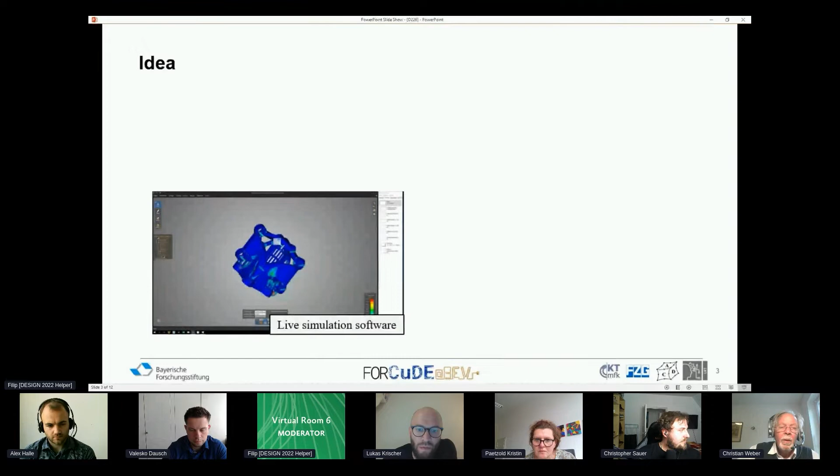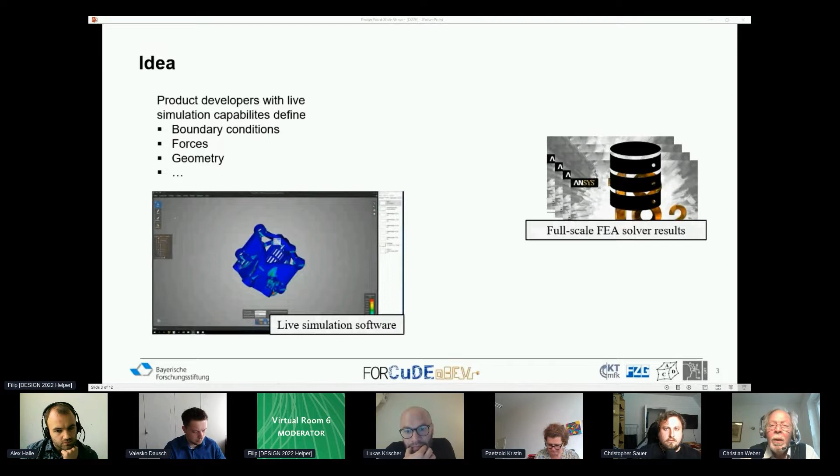So in our case, product developers have some kind of live simulation capabilities, which allow them to use live simulation software and to define some boundary conditions, some forces, some load cases, and mainly their geometry using their computer-aided design software. However, as a database, you need to have some full-scale finite element analysis solver results that you trust. This is your trusted source of data.

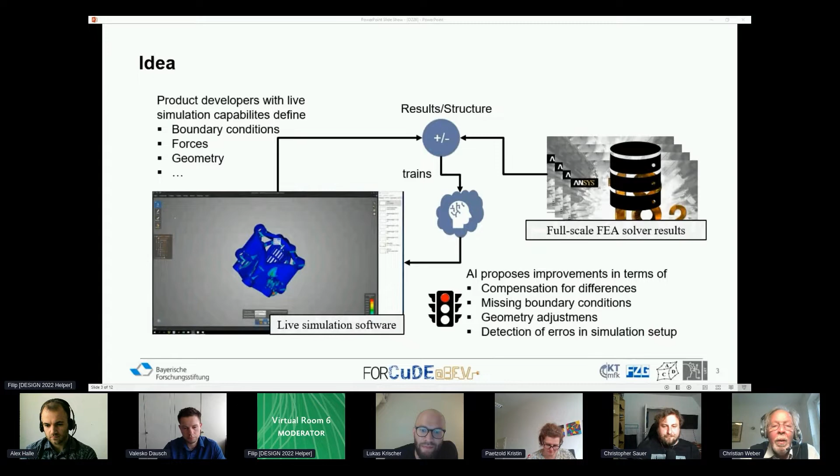So the idea was to compare both regarding their results, mainly in displacements, forces, and so on, and compare their structural build-up - boundary conditions, definition of load cases, and so on. With this comparison, we then wanted to train some kind of AI or engineering support system, which is able to propose improvements to the product developers and give them some kind of grasp on their design, putting away pressure from the simulation experts, which maybe need to do some kind of early evaluation of designs in this case.

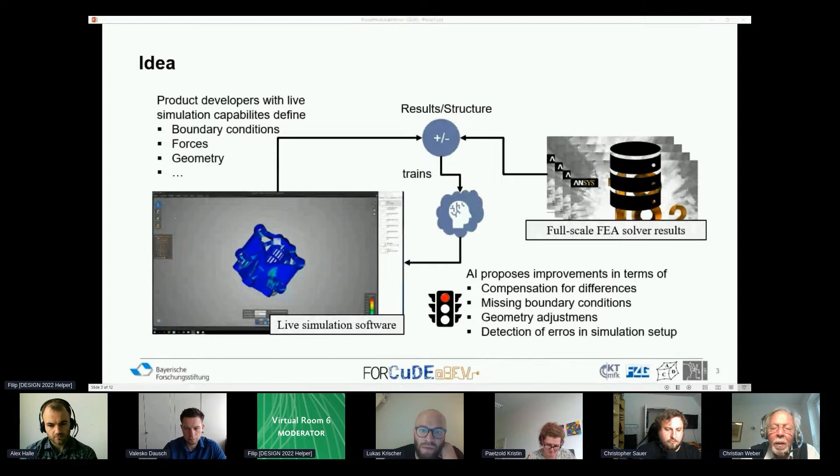So the AI proposes improvements in terms of compensation of differences, maybe analyzes missing boundary conditions, proposes geometry adjustments, and detects errors in the main simulation setup. This could happen via a traffic light, for example.

The concept in our paper was we would like to put the inputs - so for example, geometry, parametric design parameters, if you use parametric CAD models, the boundary conditions, forces, and the solution of the live simulation software - into some kind of machine learning model. Inside the machine learning model, there would be defined some kind of model, for example neural networks, decision trees, or support vector machines, and the architecture or the hyperparameters of the respective machine learning model.

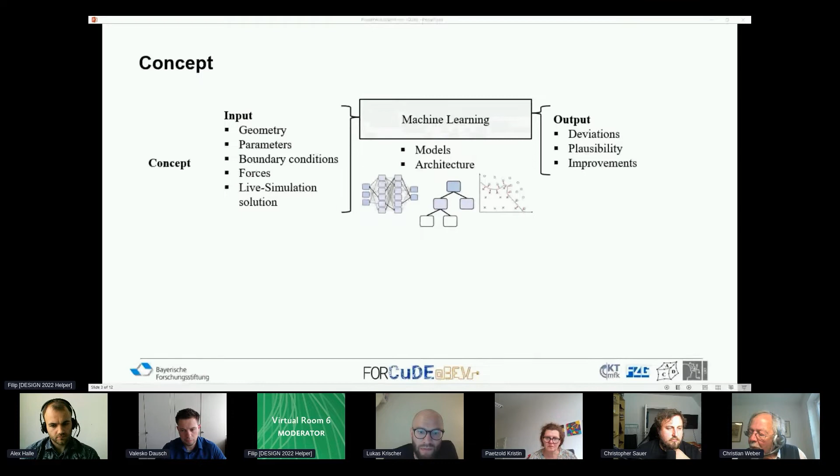And the output would be the deviations between the live simulation solution and our trusted source of data, the full-scale finite element solver results. Output could also be plausibility, meaning does this fit to my defined boundary conditions or defined forces in my trusted source of data? And output could also be some kind of improvements - for example, chamfer this radius or something like that.

We broke down this concept into a use case or a prototype. This prototype mainly consists of the geometric parameters with a parametric CAD model and the forces that would be applied to this model. The boundary conditions would be set fixed in this case. We would use a decision tree algorithm for our use case, and the output would be some kind of difference between the live simulation result and our trusted source of finite element results.

It is worth noting that the finite element results - the parametric sets differ between the live simulations and the finite element results. So we wouldn't have to fit the model. We would build up the machine learning model, which needs to interpolate between our data points from the finite element results.

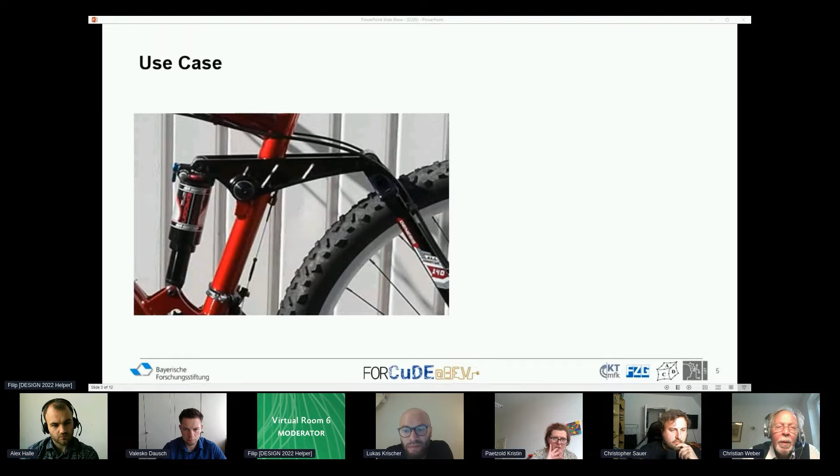As I said before, for our use case, we set out for a mountain bike rocker switch, which was modeled in PTC Creo with parametric modeling, and then later loaded into the ANSYS Discovery live simulation software, where we applied some boundary conditions.

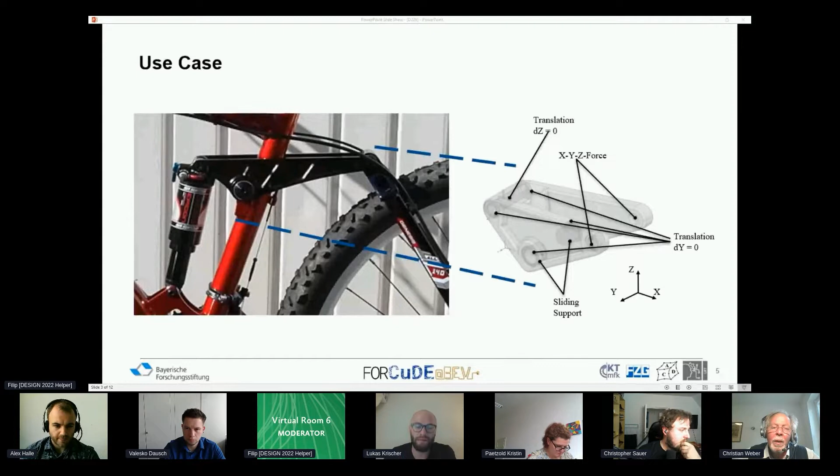You can see that here in this picture. For example, we fixed the translation in the z-axis where the spring is located, and we applied an XYZ force where the wheel would bring in the forces during driving. On the bottom-hand side, we had a sliding support where the rocker switch is able to move freely between the screwed-in parts.

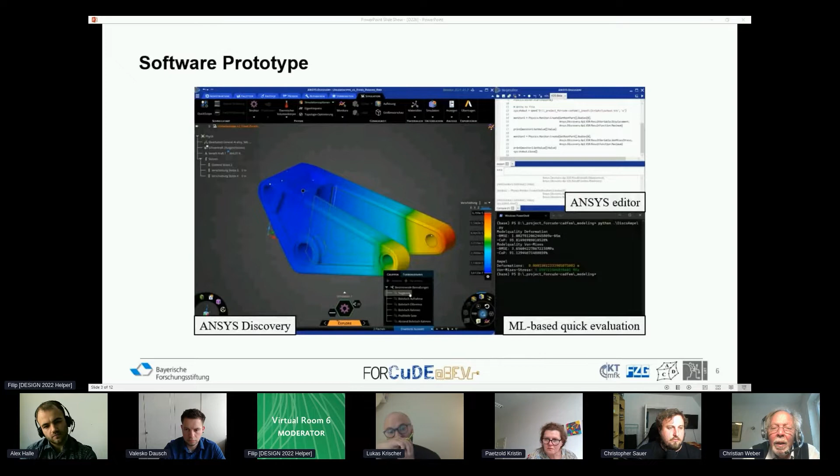So here you can see our software prototype. On the left-hand side, the product developers would see their current mountain bike rocker switch design in ANSYS Discovery. On the right-hand side, we have the script editor and the ML-based quick evaluation, which allows us to see directly an 'ampel', meaning traffic light in German, showing the deformations, the deviations between the live simulations, the deformations from the machine learning model of the finite element results, and the von Mises stresses.

Our results looked very promising compared to a machine learning-based only approach, where we would train our machine learning solution based solely on the finite element results. We can see here, for example, by voxel size and live simulation accuracy of nearly 33%, we win over the ML-based only prediction model concerning the relative root mean squared error of our models.

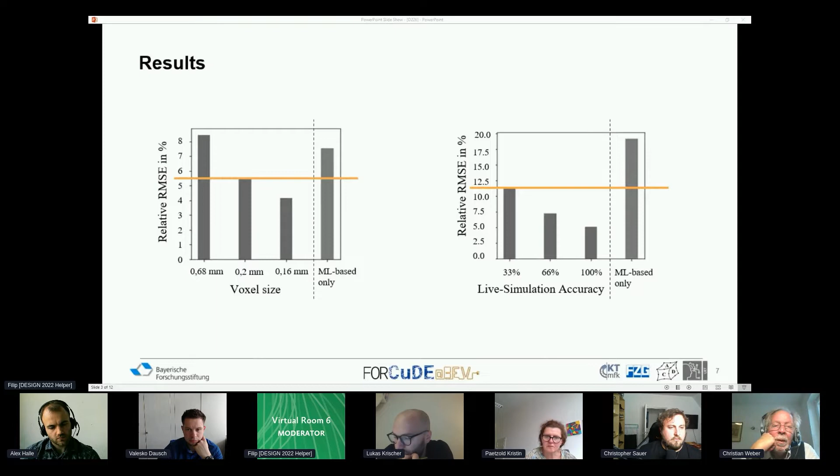This research was part of the Bavarian Research Association project FORCuDE. Thank you for your attention, and I'm happy to answer your questions.

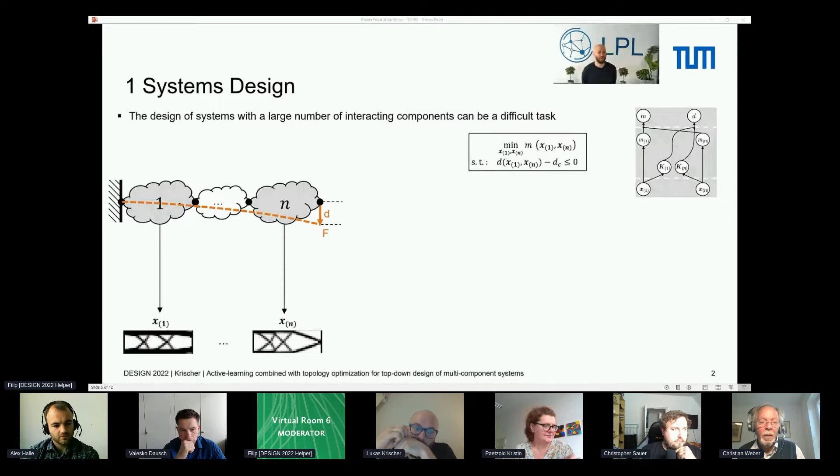You would usually just right away design the system using classical monolithic optimization approaches. However, with drivers of complexity such as the number of components, the different poses, or multiple disciplines, this task gets more and more complex.

Therefore, in systems design, you usually apply decomposition schemes. Decomposition schemes have the disadvantage of intense coordination effort, as they try to communicate information between systems and components to each other. A different way of handling that is solution space engineering.

Here you make a complete decoupling, meaning there is no further communication between the components and the system after decomposition. However, this complete decoupling also has disadvantages. The first one is the exclusion of optimal designs. The second one is a commitment to a design that you cannot build later on.

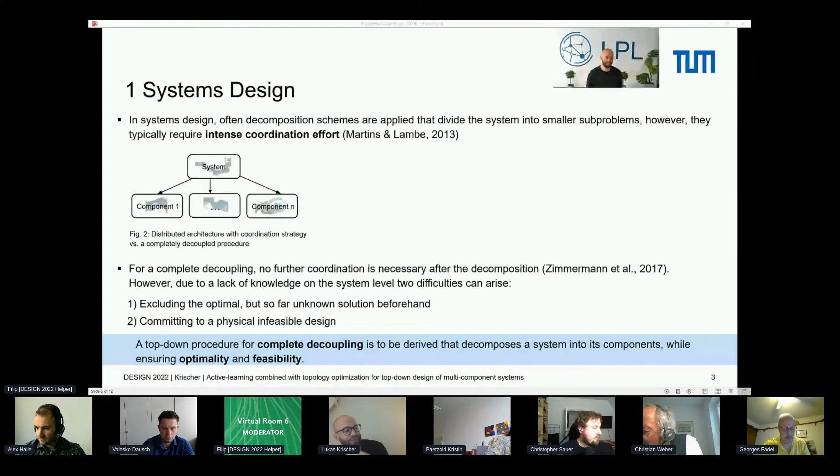Based on that, we derive that a top-down procedure is needed for complete decoupling that still enables optimality and feasibility. Based on this conclusion, an approach called informed decomposition was developed. It consists of a two-step optimization.

On the system optimization level, we carry out an optimization based on meta models that ensure both feasibility and optimality. It is carried out on a reduced order model, meaning this system optimization is quicker than a classical monolithic optimization. Afterwards, you can derive decomposed component requirements based on the stiffnesses of each component.

And then you only carry out the expensive topology optimization based on finite element models. This has one big advantage, because this optimization is based on stiffnesses and not on load cases, meaning you only need to carry it out once, independent of the number of poses, load cases, or components.

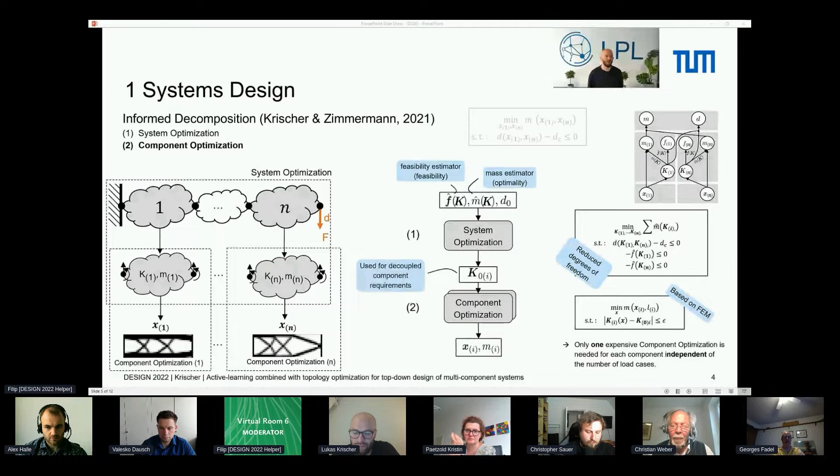One disadvantage of this method is the training of the meta models. Since the system optimization is based on machine learning models, you need to create the input data for it. This training process is computationally expensive, and on top of that, the training data is also not well distributed, meaning most of the design space you are sampling in is infeasible.

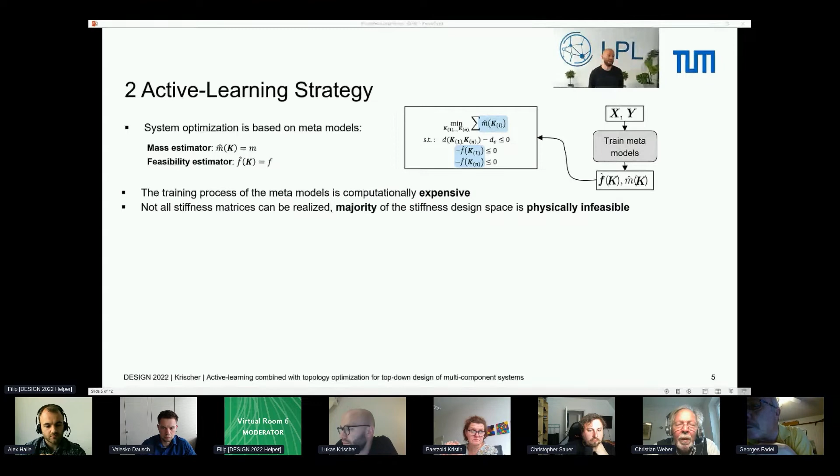Therefore, within this presentation, we will introduce an active learning strategy that should ensure both an efficient training process and well-balanced training data. Secondly, since we want to avoid additional training, we want to have meta models that can work with different geometrical dimensions.

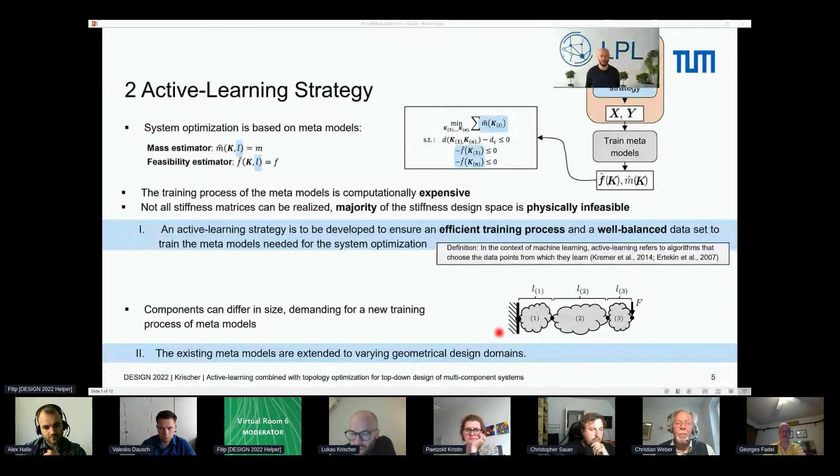So imagine, for instance, this three-component system with different lengths. We want to have meta models that can be used for all three components, for instance. The active learning strategy itself consists of two parts. The first part is concerned with classification sampling, so here we want to figure out where the boundary is.

So where are the physical feasible and infeasible designs? Based on this classification sampling, we afterwards only want to sample within the feasible region and want to know the relation between the stiffness of a component, the geometrical dimensions, and the mass of the component.

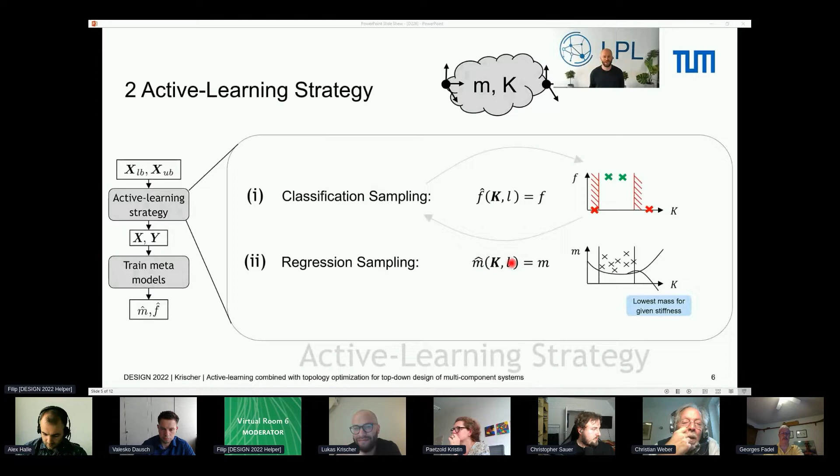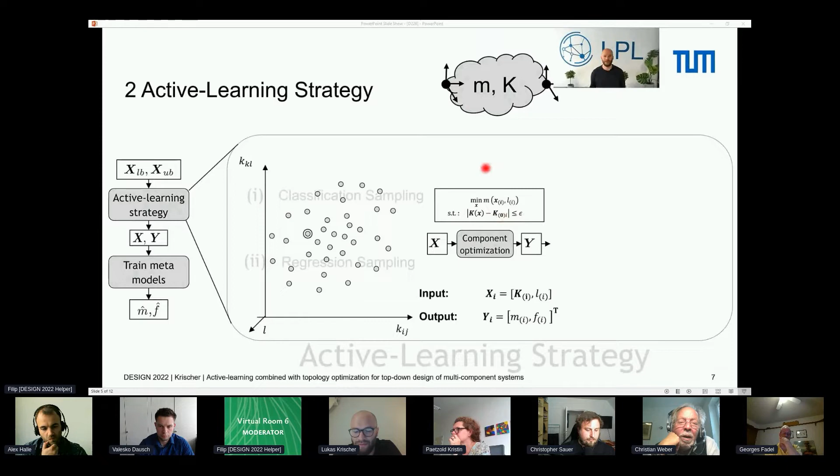To explain that more in detail, we now go through one iteration exemplary. Imagine you have a sample of stiffness values, and you just choose one of those values and evaluate it by the known component optimization. Now we are looking for the minimum mass with respect to the given stiffness values. And if the optimization converges, we know two things: we know that this stiffness combination exists, and we also know the mass of the component.

We can do that for a different value, and we again figure out, okay, this design exists. However, if we choose a data value which is out of the feasible region, the optimizer won't converge, and we then know that this design does not exist.

With this method, we can then compute a decision boundary, and based on it, we can carry out another iteration. So we choose just points that are close to the decision boundary, and re-evaluate all those points. After a certain number of iterations, we choose the final decision boundary and only sample within this boundary to get information about the relation between the stiffnesses and the mass values.

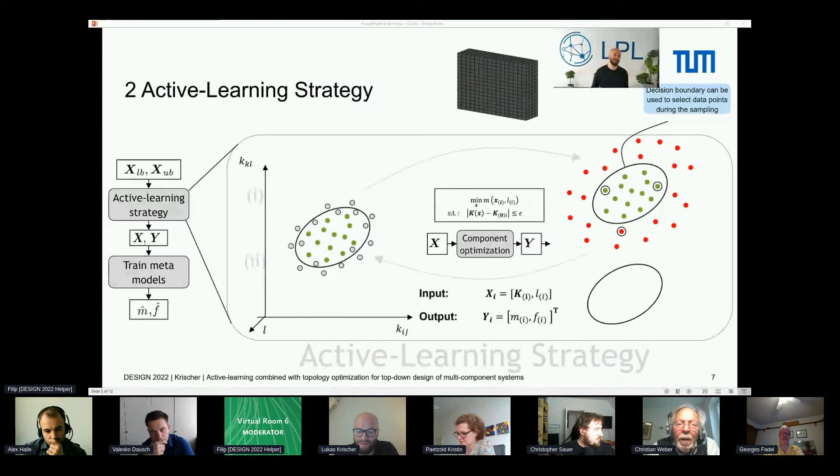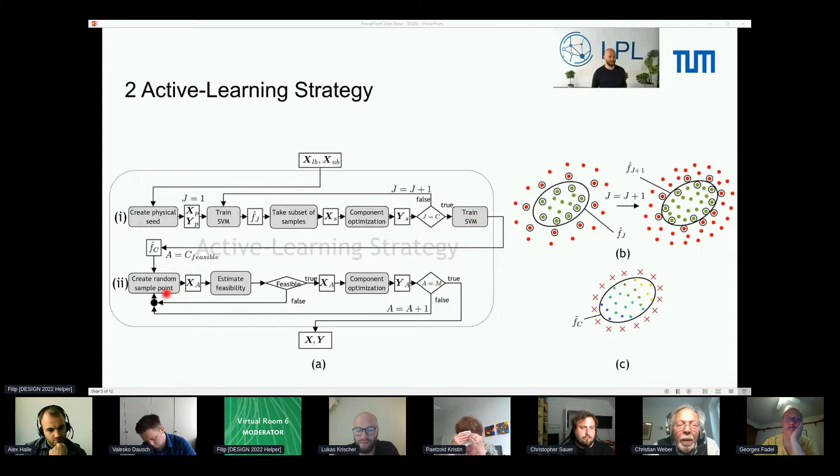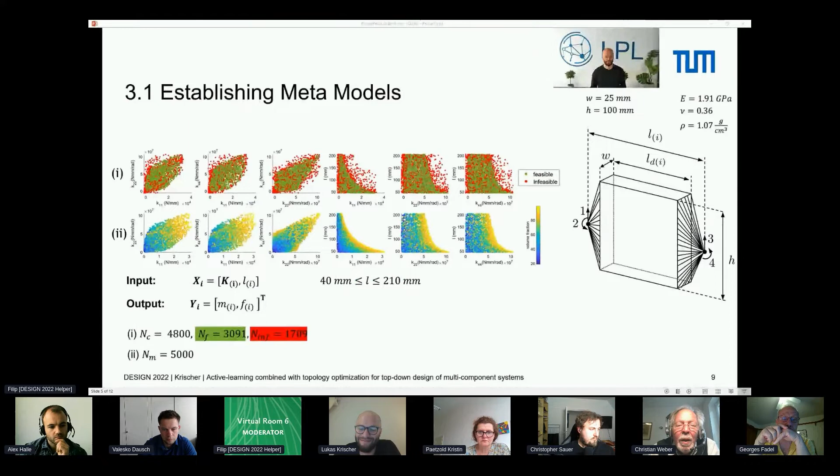These meta models can now be used to carry out a systems design. Our exemplary problem is a robotic system with 3 components that have a length of 100 millimeters, 200 millimeters, and 50 millimeters. For the monolithic optimization that we use as a benchmark, we get results as the following.

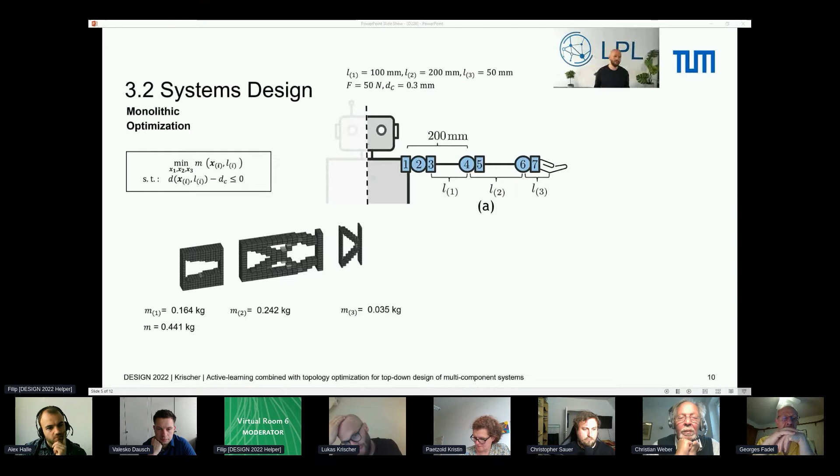So we have 3 components. In total, the robot arm weighs 0.441 kg. In comparison, our informed decomposition using only 1 meta model for all 3 components gets results that are really close to the monolithic benchmark results, with 0.443 kg.

Only the last component differs a bit because it has a strengthening that it's not supposed to have. So in total, we applied our approach with 1 mass estimator and 1 feasibility estimator to a 3-component system, and we only deviate below 1%.

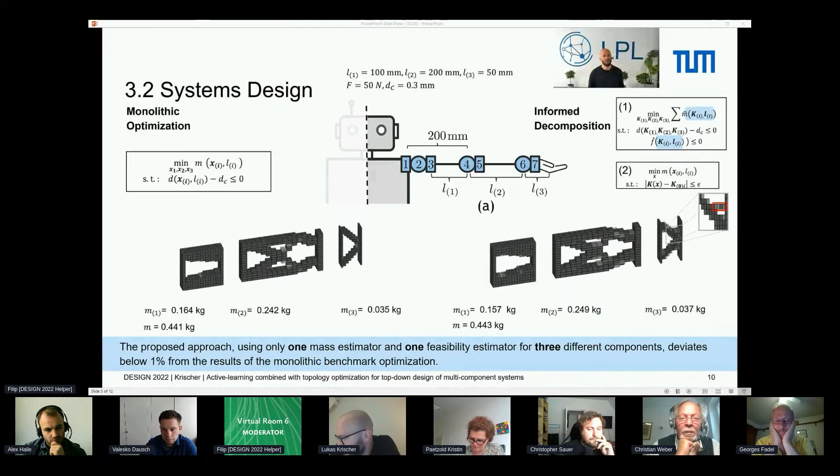Here you also see the post-process results, and in future we want to apply it to 3-dimensional problems with components that are described by 6 degrees of freedom interface points.

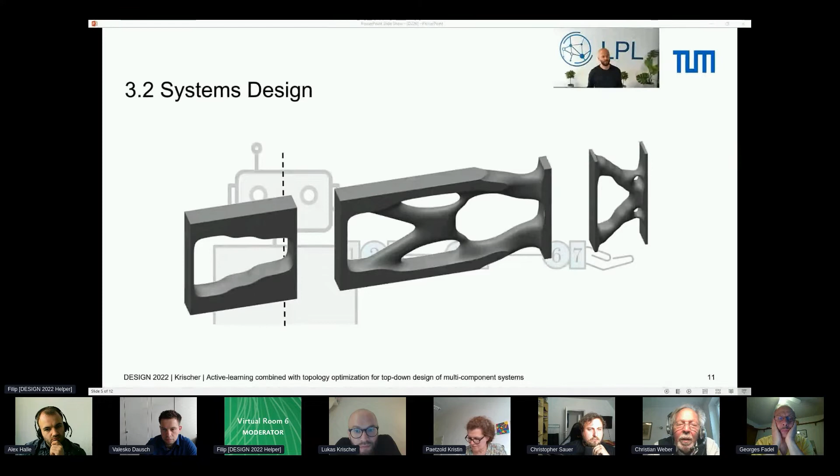Thank you very much for your attention. I'm looking forward to your questions.

Hello everyone, my name is Valesko Dausch, and today it's my pleasure to present you our contribution of an AI-based approach to optimize stress in shrink fits. Please allow me to first talk about the stresses in a cylindrical shrink fit.

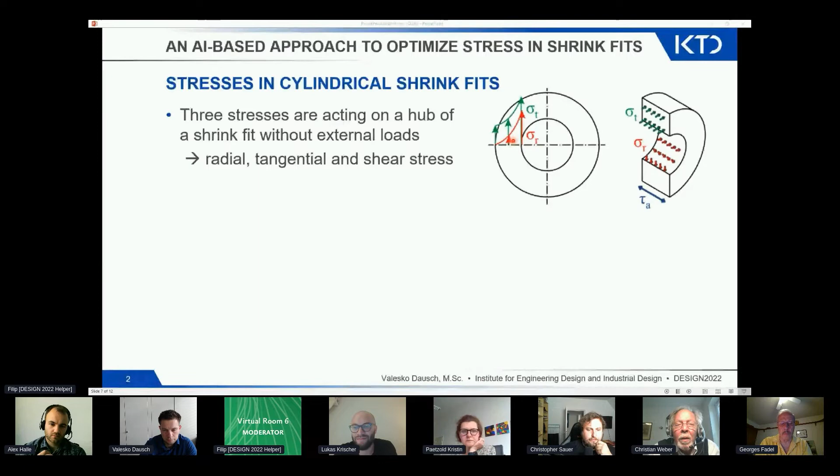There are basically 3 main stresses acting on the hub of a cylindrical shrink fit without any external loads, and these are radial, tangential, and shear stresses. You can see on the picture right here that the radial and tangential stress are very high near the inner side of the hub and will therefore also be responsible for causing failure in the hub.

This is very important for dimensioning because the current German standard for dimensioning, the DIN 7190, assumes a plane stress condition for dimensioning the shrink fits. This means that the radial stress you can see here is basically constant over the complete length of shaft and hub, meaning that shaft and hub have the same length in this assumption.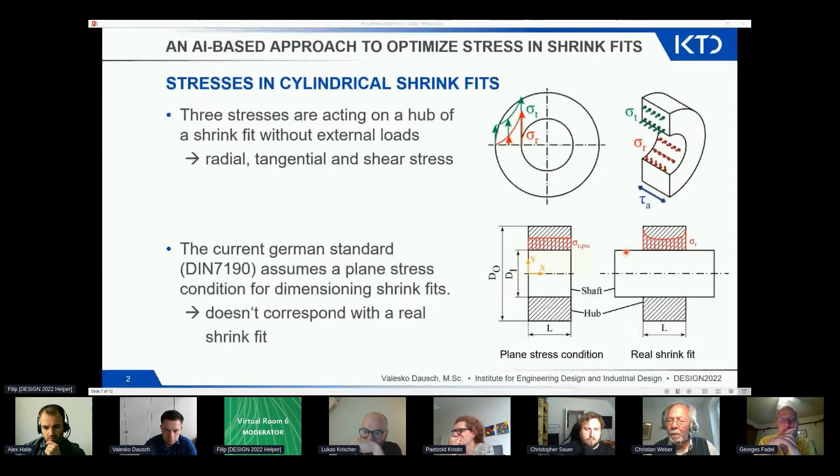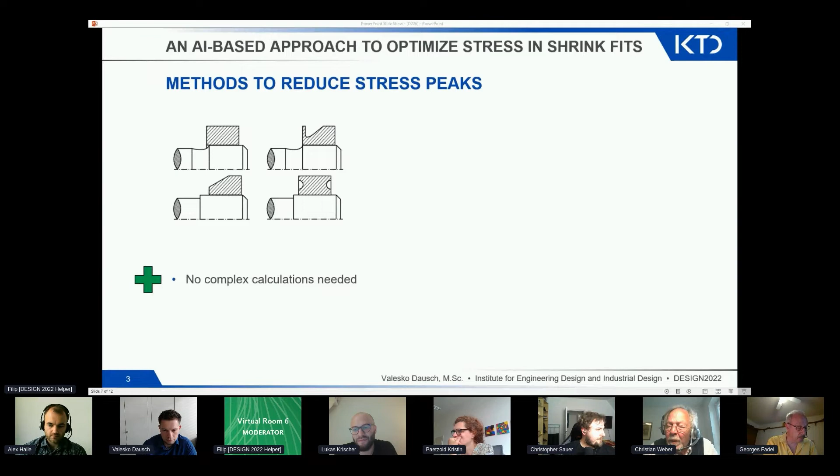There are numerous methods to reduce the stress peaks. In this picture shown here, we can see some very easy modifications which can be applied to the hub to reduce stress peaks. All of these shown methods have in common that they don't need any complex calculations, but therefore require additional work and time, and may restrict the common functional area of the hub. Also, they can be not very accurate sometimes.

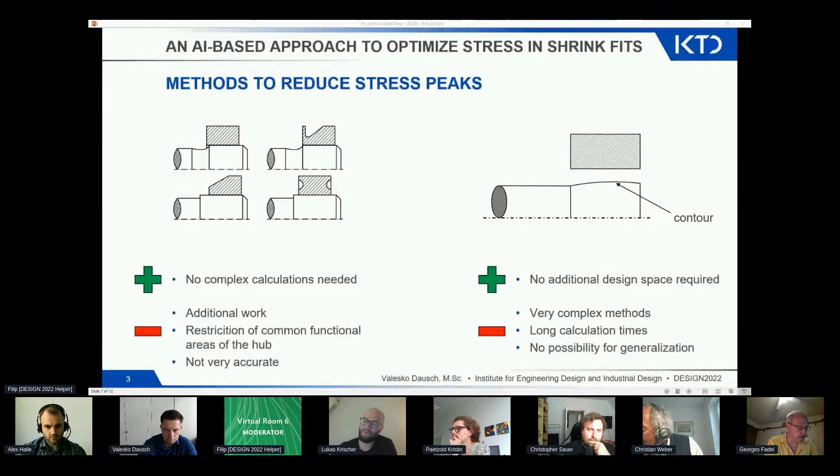There are also other more complex methods we can use. For example, if we take apart a shrink fit on the right, we can see there's a contour hidden in the area of the joint, and this contour will reduce the stress peaks by a calculation done beforehand. This method does not require any additional design space, but is therefore very complex, will require long calculation times, and most of these methods trying to calculate such a contour are lacking the possibility for generalization, meaning that if we change the material or the geometry itself, it doesn't work anymore.

But what is the problem and goal of the presented approach? The peak stresses near the hub edges can cause spontaneous failure of a shrink fit without using the full potential of the used materials and without using the full potential of the whole joint itself. This will, especially for brittle hub materials, result in a low use in industrial applications.

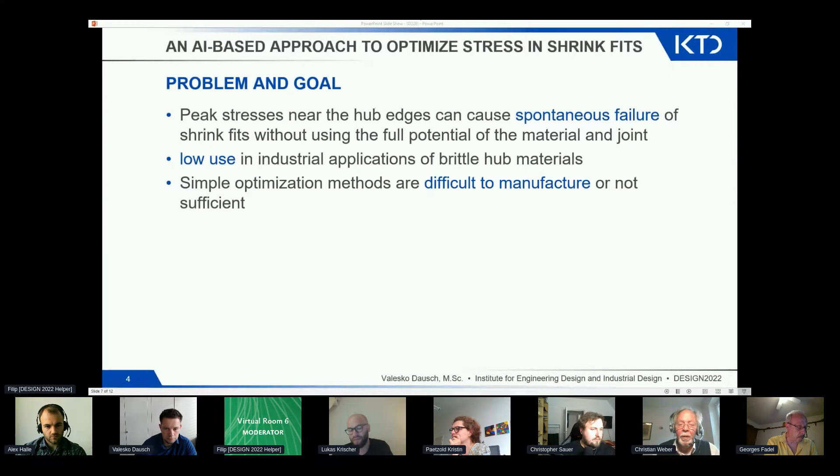And as shown before, the simple optimization methods are very difficult to manufacture and may not be sufficient enough. And for the complex contouring methods of the shaft, it's very hard to perform and requires a lot of expert knowledge beforehand. So the main research question is how the design of shrink fits could be supported using artificial intelligence to optimize material utilization and stress conditions for a wide range of application scenarios and conditions.

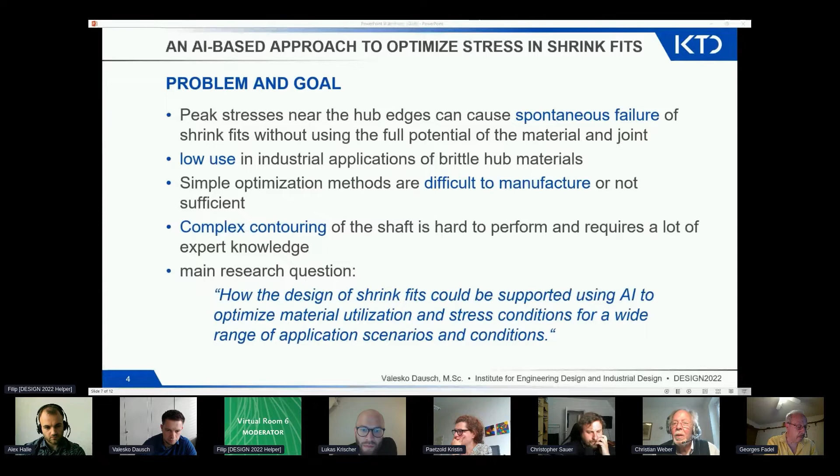To detail our approach further, we focused on the machine learning part of AI, which can be split up into unsupervised learning, supervised learning, as well as reinforcement learning. We chose a reinforcement learning process, which is shown on the right here.

We have an agent, which will resemble in our example the contour of the interstice, and this agent will take an action A at a time step t to react with an environment, which in our case is the simulation of the shaft hub connection in ANSYS. The simulation itself will output a state for a new time step as well as a reward, which is then fed back into the agent to take a new action. This process is run over and over again until a certain criteria is reached.

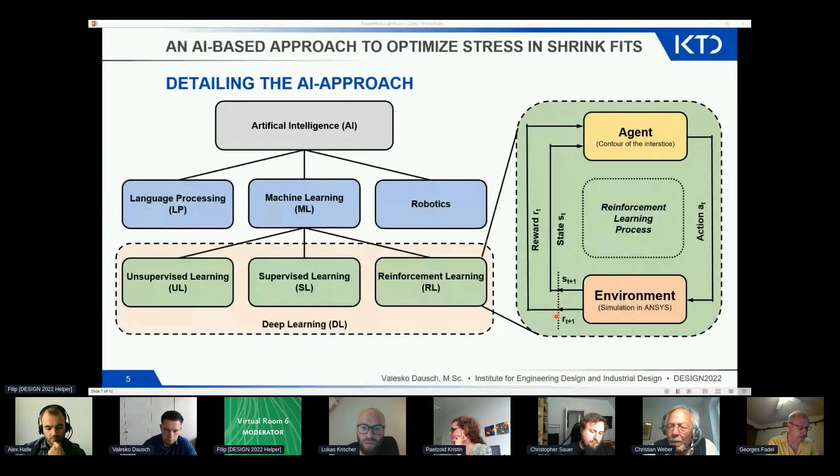In our example, the state is the observation of the stress or pressure distribution in the joint, and the reward is the difference between our target value at a specific point and the actual value we receive in the simulation. To further understand our approach, please have a look at our contour defined here.

The contour consists of a number of points, n, and each of these points has the ability to move upwards or downwards independently from its neighbor. We limit this movement by a lower and upper action limit divided into certain steps by a step size k. After every iteration, we export the pressure or stress value depending on what you optimize for.

We then feed it into a Q-learning algorithm, which will create a Q table. The Q table will contain in its rows several state vectors, one state vector for each point, so S1 to Sn, and the state vector will contain the difference, or several possible differences, for every point between the stress we want to achieve and the stress exported from the simulation.

And in the columns, we will have the actions you can take, meaning the movement of the point upwards or downwards. We calculate the Q values to pick the best action based on the Bellman equation.

The new Q value is calculated using the current Q values as well as the maximum expected future Q value. You also have the learning rate and discount factor to balance your learning. And last but not least, the reward.

If we take a look at our results, we started out with this pressure distribution in red. After some iterations, the results are not very good because we have this kind of oscillation while learning. After learning, in the last iteration, we have a very good distribution of our pressure, or stress in this case, without looking too much at the singularity because that's just a mistake we can't avoid.

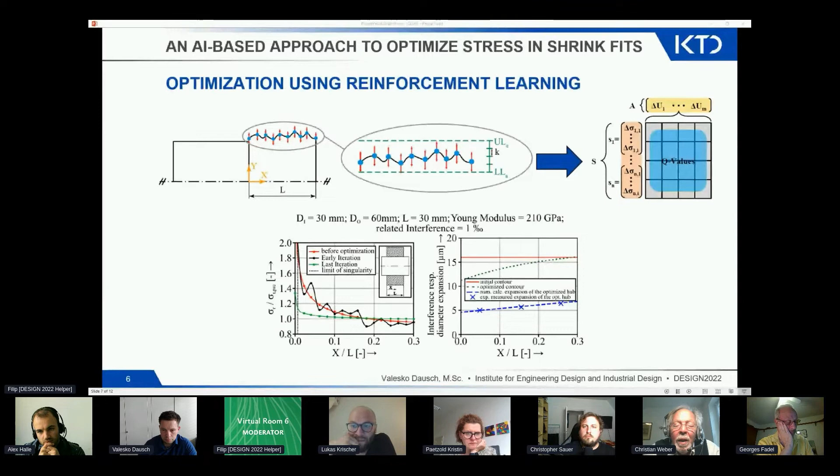Please let me conclude that the presented approach aims to optimize any stress in a shrink fit using Q-learning, and that in the future we want to develop a deep Q-learning algorithm which is also making use of a continuous solution space and will therefore increase the accuracy of our approach.

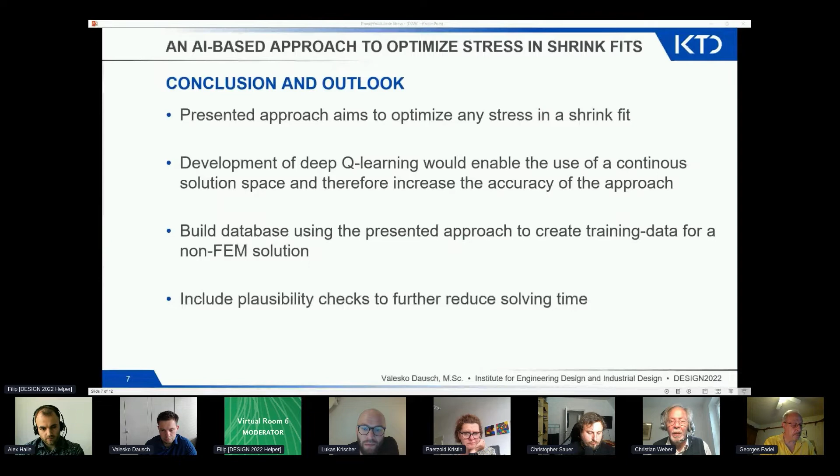And also we want to build a database to make use of training data in a way that we won't need any FEM at all. And last but not least, we want to add to our approach that we can use plausibility checks to further reduce the solving time without having the need to calculate for unplausible contours.

Thank you for your attention, and if you have questions, please don't hesitate to ask them.

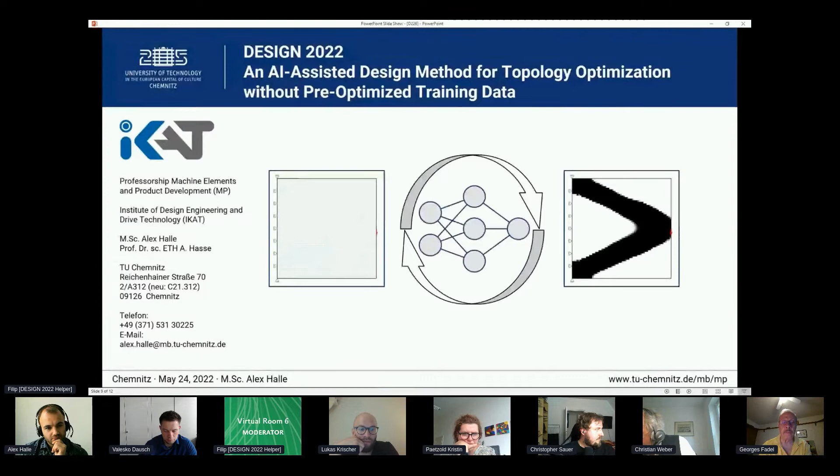Hello, and welcome to my presentation on AI-assisted design method for topology optimization without pre-optimized training data. First, let's start with the problem. Conventional topology optimization is able to provide optimized geometries for many practical cases by means of an iterative process.

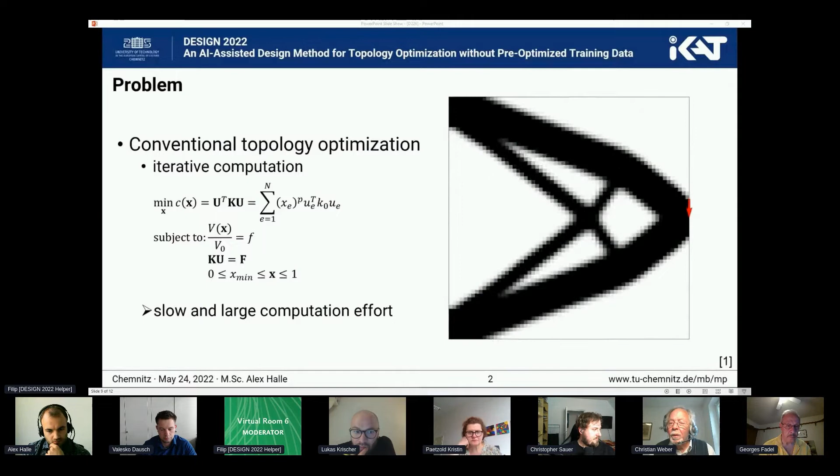Each iteration involves computationally intensive operations, some of which are here displayed as equations. The most critical ones are assembling the stiffness matrix and solving the system's equation. Due to its iterative nature, traditional topology optimization is typically slow and computationally intensive. Here on the right you see an example which took roughly 2.8 seconds to compute.

One possibility in order to make topology optimization faster is to use artificial intelligence. But why artificial intelligence? The benefit of artificial intelligence is that it has the potential to help humans with tasks that are difficult or time-consuming. For example, AI can be used to help with data analysis, pattern recognition, and decision-making. Additionally, AI can be used to automate repetitive tasks, which can free up time for people to do other things.

Ironically, this was the response of an artificial intelligence called GPT-3 to the task 'Write a paragraph describing the benefit of AI.' As you can see, AI is capable of solving the most difficult tasks. I will often talk about AI, more specifically the field of artificial neural networks. But the explanation of how artificial intelligence or artificial neural networks work is not part of the scope of this presentation.

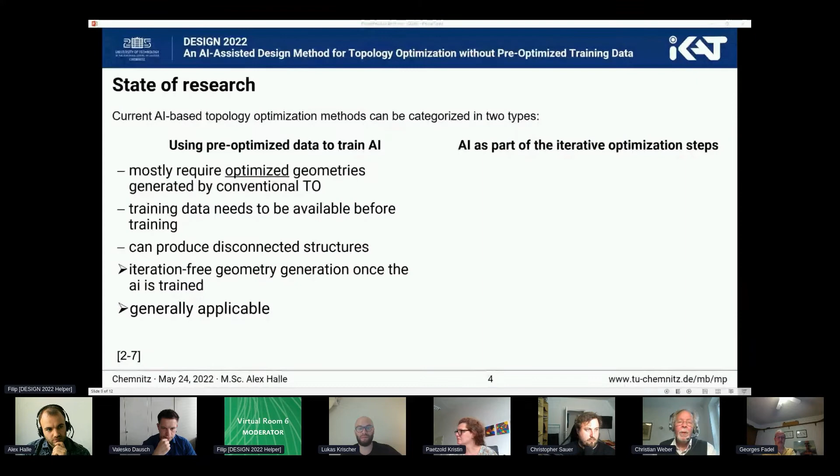The negative point is that the training and the conventional algorithm combined require a high computational effort. Also, they often need to be retrained for new boundary conditions and are therefore not generally applicable. On the plus side, it can reduce the computational time and achieve great results.

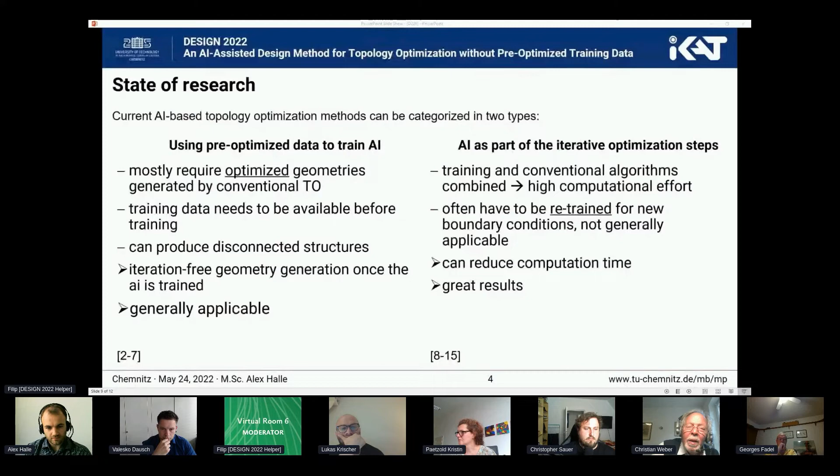Now let's come to my method. My method uses the so-called predictor evaluator network that was developed for this case. The principle is relatively simple.

First, we have some input data that is randomly generated. In the case of topology optimization, these are the kinematic and static boundary conditions, as well as the target degree of filling. This data is passed to the predictor, that is an artificial neural network, and it is the task of the predictor to generate the geometry that is here called output data.

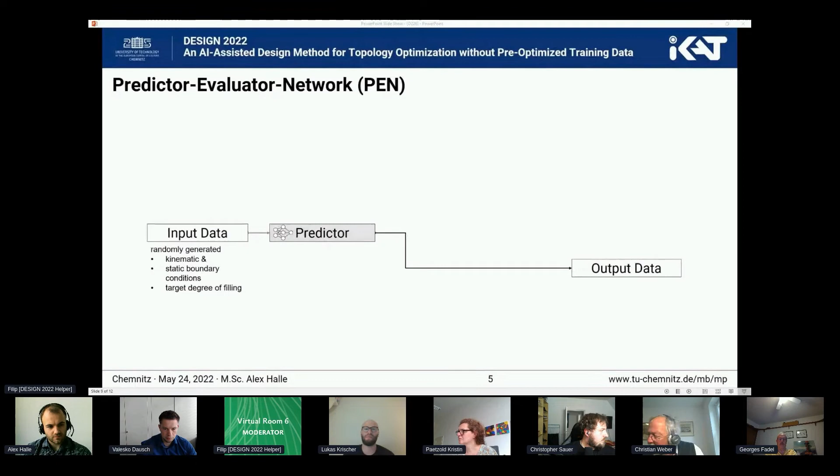In order to learn, we use some evaluators. The first and most important one is the compliance evaluator that calculates the compliance. This compliance value is passed to the quality function.

This quality function calculates a quality function value, and during training, the predictor needs to adapt its parameters in order to minimize the quality function value. Compliance alone is not enough to generate a topology optimized geometry.

We need also some additional evaluators. One is the degree of filling that calculates the current volume fraction and compares it to the target volume fraction. Another is the checkerboard filter, which calculates the amount of checkerboard patterns in the predicted geometry and penalizes them. The last is the uncertainty evaluator that calculates the amount of gray or intermediate values in the geometry and also penalizes them.

The quality function uses this equation, which is just the weighted product of the evaluator values.

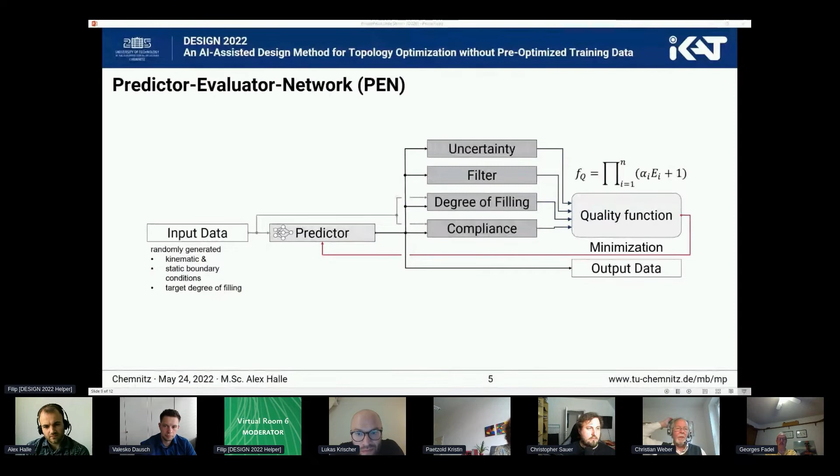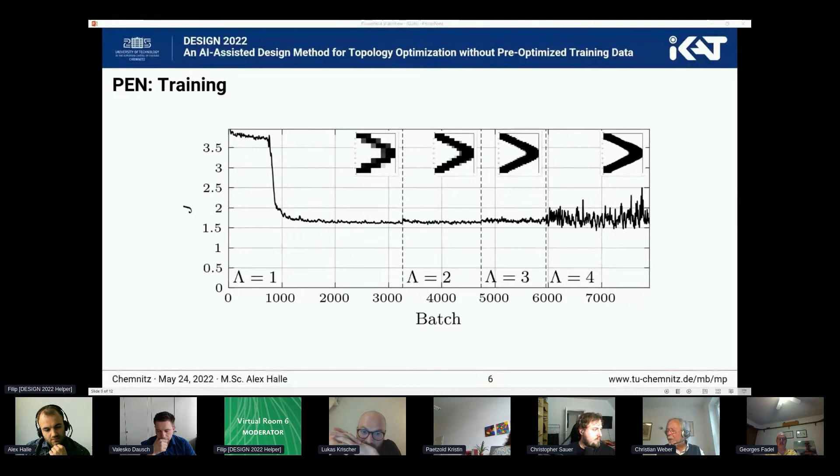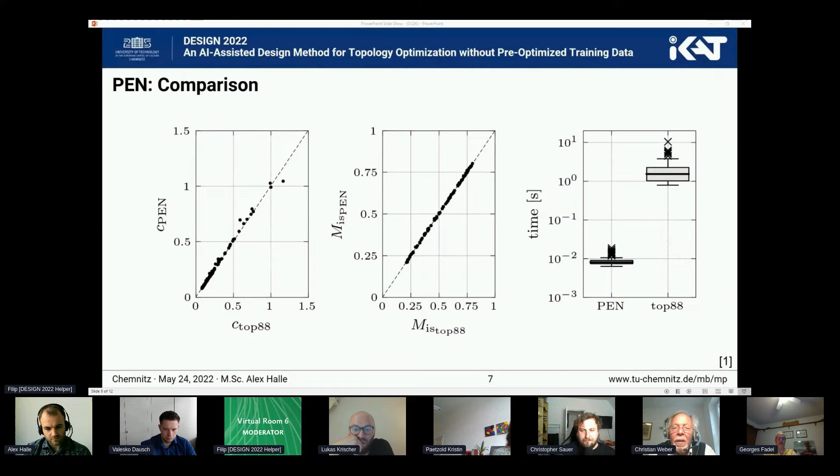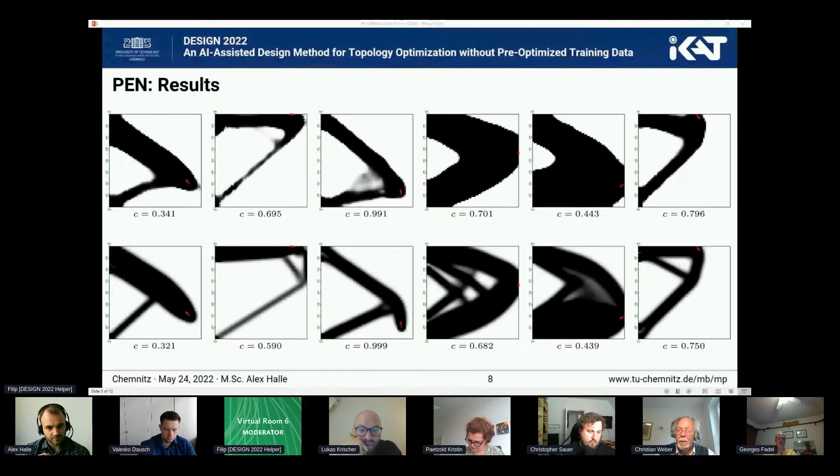Here we can play around with different boundary conditions as well as different degrees of filling.

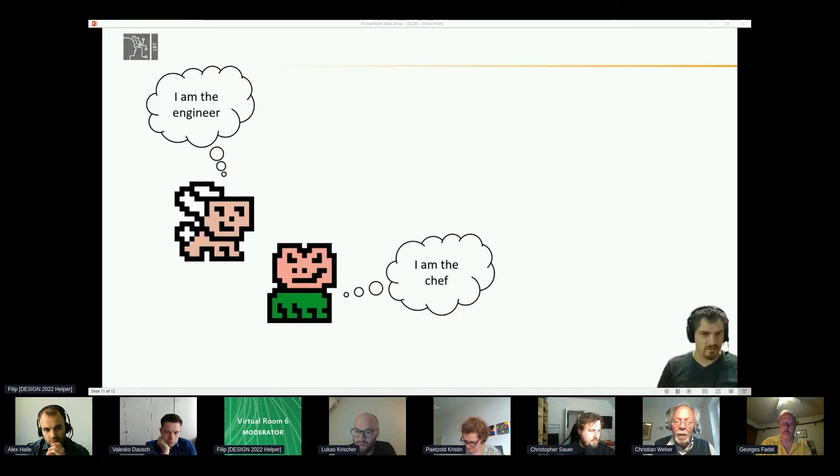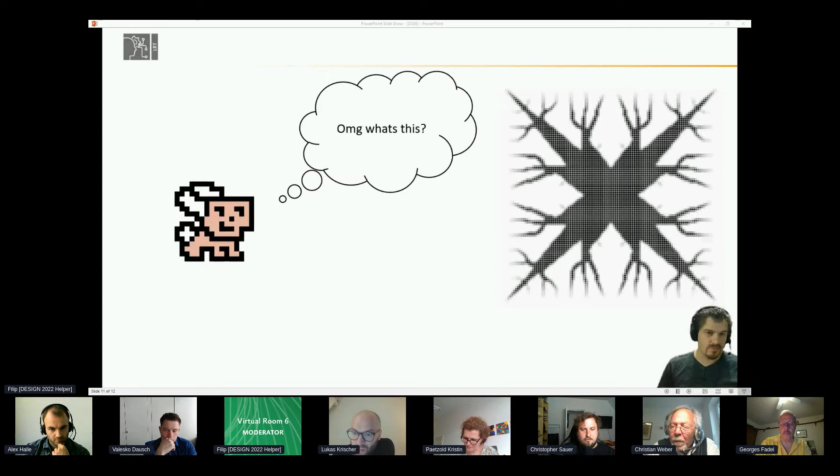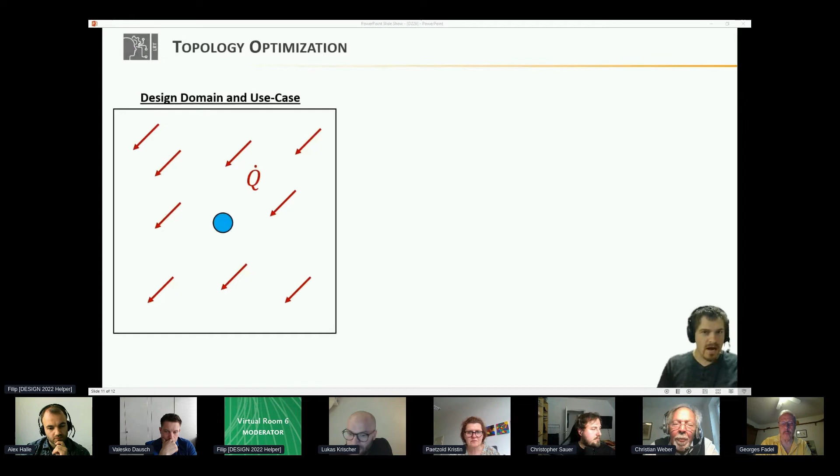The main task for the engineer is to design a product. One common approach to finding a reasonable solution is structural optimization. We can use, for example, topology optimization, which can lead to such a fancy snowflake structure. By defining a design domain and applying certain load and boundary conditions, we can minimize the thermal compliance, which leads to our snowflake.

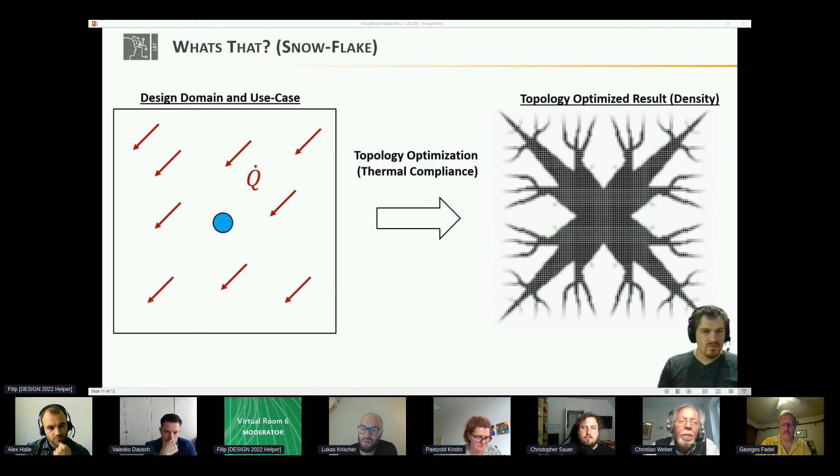What we need to do now is reconstruct it. But such a task is quite messy and boring. So how can we help the rabbit? We can try to automate the parameterization of such optimization results by considering skeletons and metaballs.

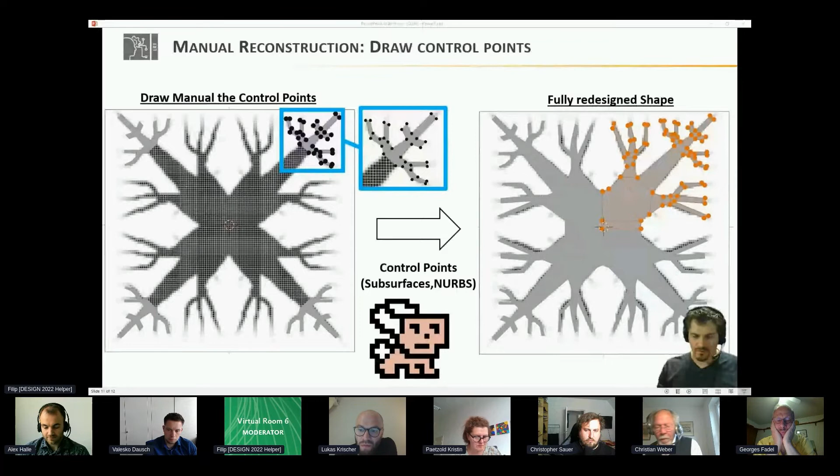We first need to know how we would reconstruct it manually. There's one simple option using, for example, Blender, on which we draw simple polygon meshes. These polygon meshes serve as a control grid for the freeform surfaces, or subdivision surfaces, and we can subdivide such a geometry to get a smooth representation.

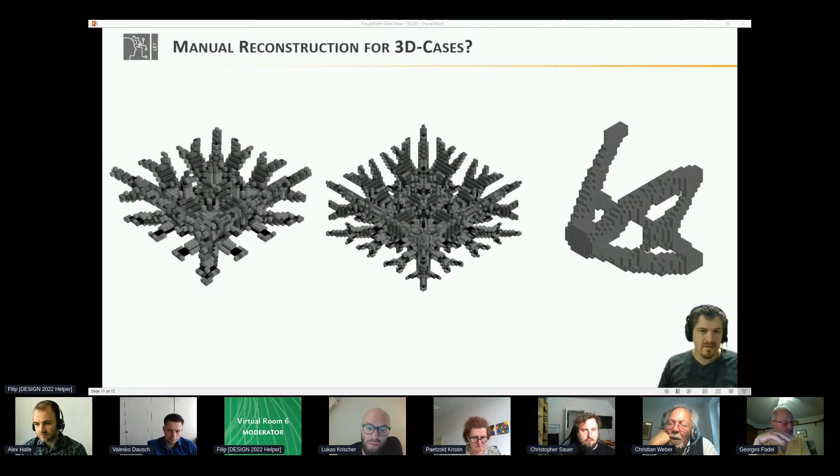The main problem is that if our reconstruction is not accurate enough, or if we need several constraints, for example to fully fulfill manufacturing constraints, we need to redraw the whole geometry, which can be quite messy again. And if we try to reconstruct 3D use cases, it's even more complicated.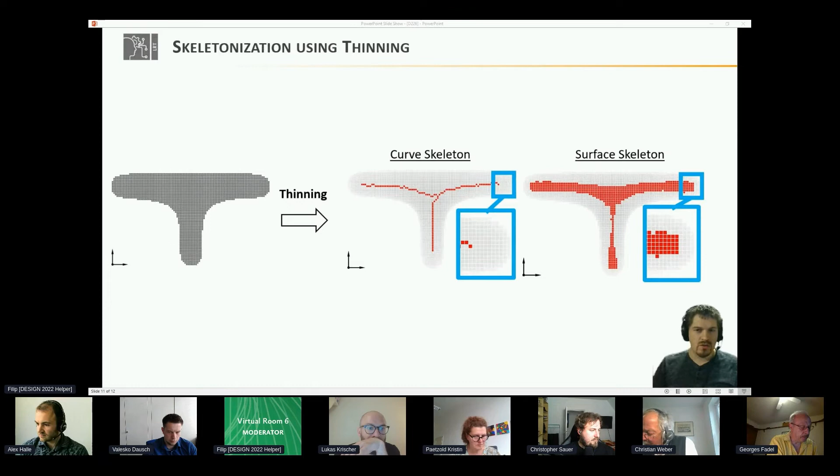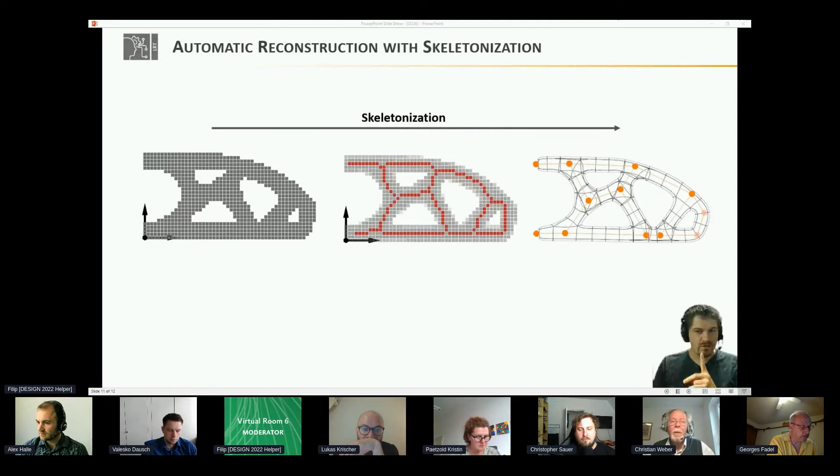By using skeletonization, we try to find midlines and mid-surfaces of our 3D geometry, which you can further use to interpret, for example, beam elements in such a skeleton. And if we apply that to our use cases, our heat sinks, we can see that we can fully automate the beamline reconstruction with one click.

So the rabbit is happy because we can automate such reconstruction, and we can consider different shape descriptors such as Catmull-Clark subdivision surfaces or constructive solid geometry.

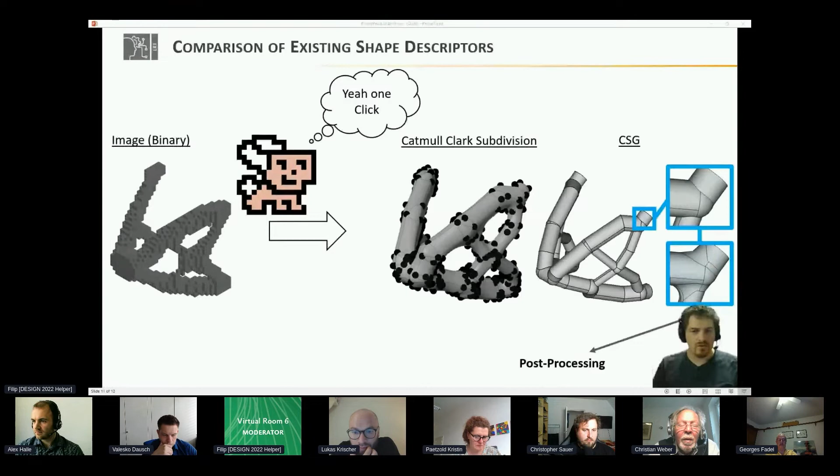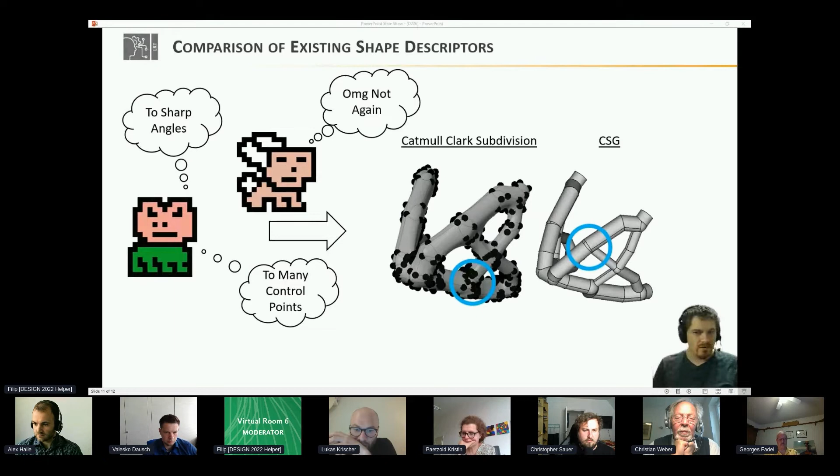The frog tends to seem a little bit angry because there are a lot of sharp angles and a huge amount of control points, particularly on branches. Maybe we can find an alternative shape descriptor which doesn't lead to such sharp angles or massive amounts of control points.

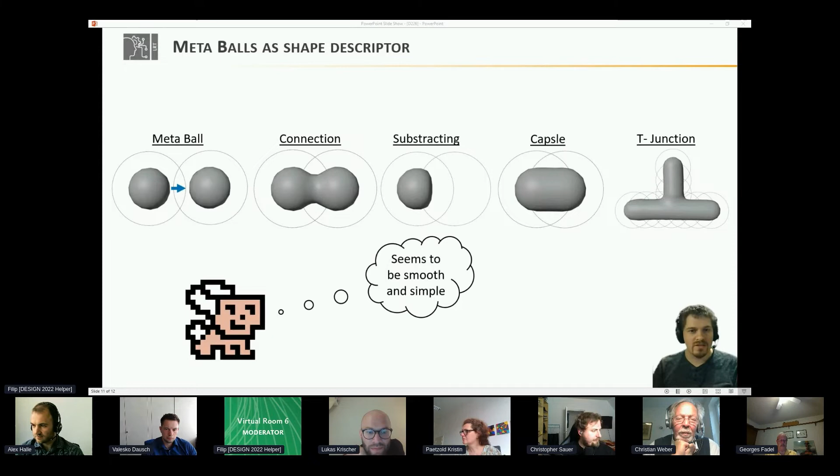What we need is something that can implicitly cover the connection of different branches in a medial ball manner. The skeletonization is derived from this concept of a medial ball, so it would be useful to use a similarity, and what we can use are metaballs. Metaballs are balls, and if you move one next to another, they connect to each other automatically. That's how we can, for example, define a capsule or a T-junction.

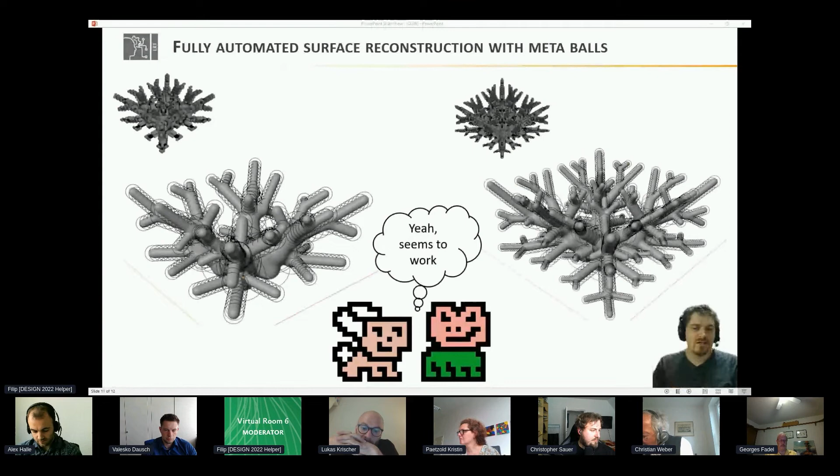And it works. We can fully automatically construct our geometry with such metaballs in nearly no time. It's smooth, and we don't have sharp edges. We don't have many control points. We can now use such parametric representations.

For example, in our case, we need it for the automated size control use case, so that we can automatically manufacture such optimization results. We also need it for verification, so that, for example, the maximum allowable displacement is satisfied.

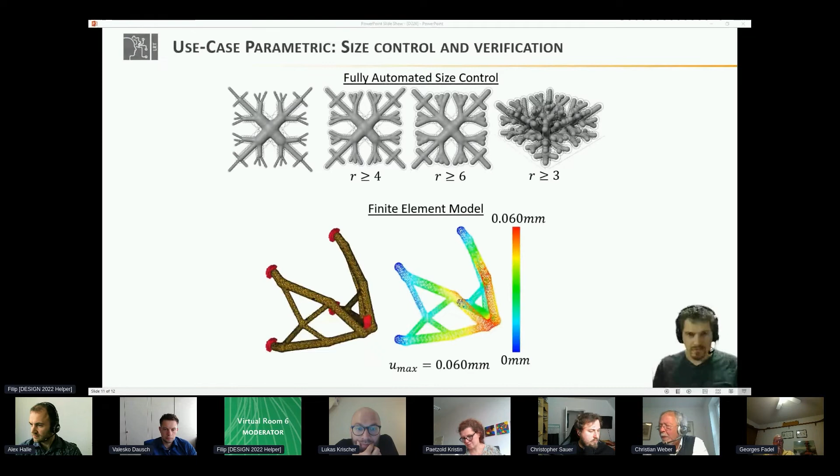In the end, the rabbit is happy because he can automatically reconstruct topology optimization results with one click and no effort. But there are some disadvantages. One is that the shape descriptor itself is not common in the engineering domain. The other is that we are only using spherical elements right now. And the last is that the reconstruction itself is dedicated to organic shapes.

In future tasks, we want to add variable cross-section along the skeleton. We also want to consider surface skeletons for the reconstruction, and we want to change the geometry and kernel function.

Thank you for the invitation to the Design 2022. I'm looking forward to our interesting discussion in a few minutes.

Thank you very much, and excuse me, I didn't know that the presentation itself was given by Mr. Denk, but Professor Paetzold will be ready for questions, if I see correctly. So this is now the turn of everybody to ask questions, and I've seen a couple in the chat. Maybe we start with these.

The first one came from Georges Fadel for Lukas, and you are asking about the test cases because they just focus on stiffness and weight, not geometry. How can you be sure you are covering possible geometric solutions that could be optimal or better than the ones you find?